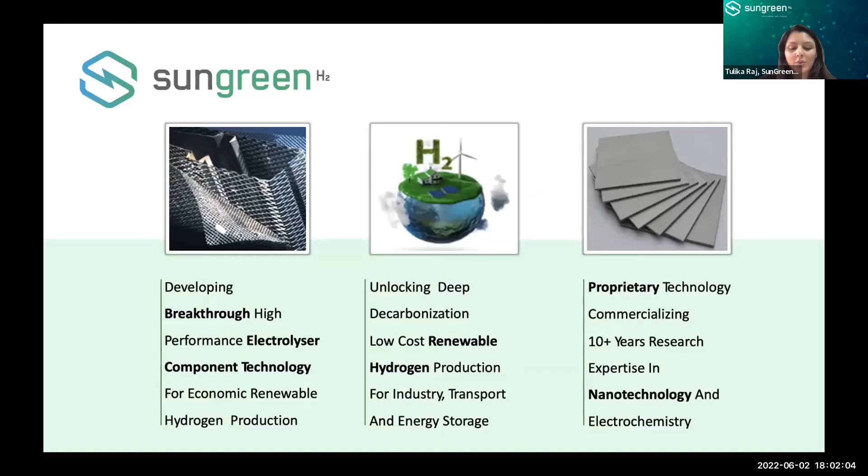Let me explain a little bit more about where the company is based and how we are tackling this issue. Green hydrogen is pretty much a global market. While we are based in Singapore, we have offices in Melbourne as well as London. Some of the customers we work with are based over in the Western Hemisphere, in the Americas as well as the European Union, and closer to home in Asia Pacific, Japan, South Korea, and Australia are really large markets for the further development of green hydrogen.

So let's take a step back and look at what we're trying to do with hydrogen. Hydrogen is not a new market. There is a lot of hydrogen in use in the world already.

The IEA expects that hydrogen use, being a completely emissions-free fuel, is set to grow in the next 30 years to 2050, and could really play a good role in delivering a decarbonized future energy system. But this largely depends on increasing the use of hydrogen, stepping this up, but also decarbonizing the production of hydrogen at the same time.

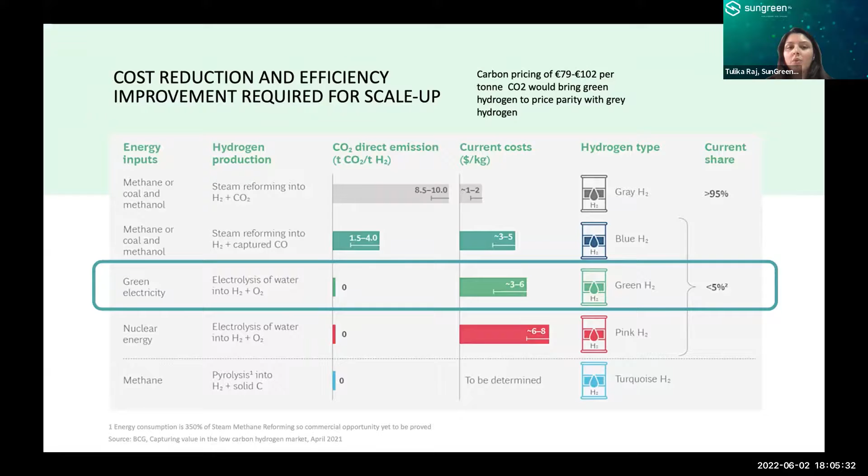So why are we into so many hydrogen production methods, and what's going on? We already have so much. 90 million tons of hydrogen is being produced in the world. Why do we need more ways of making it?

Simply because the fossil fuel reforming method of making hydrogen, which is almost 99.5% of the market as of date, creates 10 times as much carbon dioxide emissions for every ton of hydrogen made in this manner. In other words, we are talking about nearly 1 billion tons of carbon dioxide emissions currently associated with the production of conventional or gray hydrogen.

And if you can switch to a zero carbon way of producing this hydrogen, water electrolysis and green hydrogen is one method, then you are essentially talking about a way to take out 1 billion tons of carbon dioxide emissions from the atmosphere.

So that all sounds very good. It's a great way to put us on a decarbonized path of producing hydrogen. And of course, when hydrogen burns, it also doesn't produce any emissions. So you have a very clean, zero carbon way of producing the fuel, and then when you burn the fuel, there are no emissions. So it's an end-to-end zero carbon game.

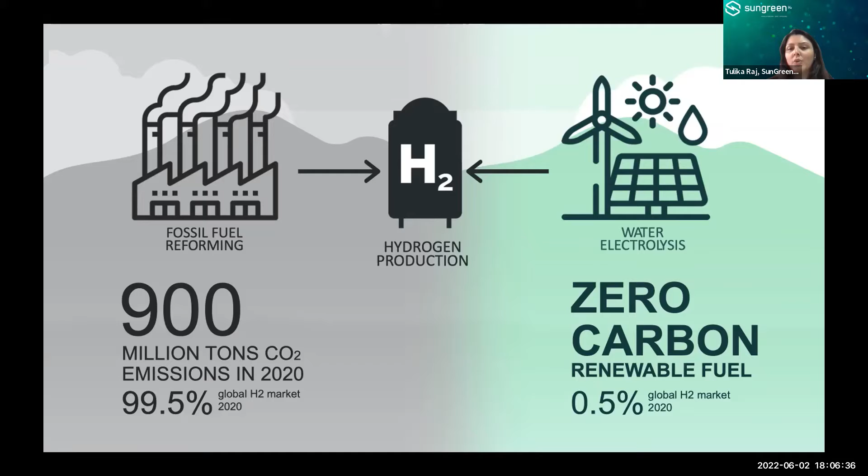So what's the issue? Why isn't the world already using so much of this? Because if you could use it, then suddenly you've got a way of having a zero carbon fuel and feedstock for our industrial use cases, for steel, chemical industry, the fertilizer industry, all our major heavy industries can start to use an end-to-end zero carbon way. And we're suddenly talking about really reducing a lot of carbon dioxide emissions from the atmosphere.

Not to mention newer use cases for this kind of zero carbon hydrogen or green hydrogen. You could use it to power your long distance transportation fleets.

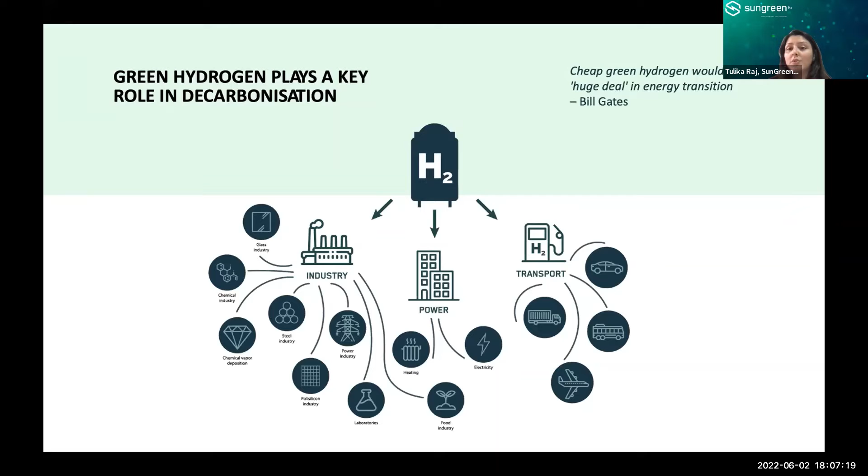You could use it to power, start to replace electricity and heat generation in homes, and also use it for long-term renewable energy storage, for example. It's some of these new use cases that are emerging, as well as the ability to replace gray hydrogen in the existing use cases, that is really driving the explosive growth in the green hydrogen market going forward.

So if it's also hunky-dory, then what's the holdup? The holdup is that globally, industrial decarbonization policy, including in this part of the world—Singapore has come out with its energy transition plan as well as its green plan—largely in Asia Pacific, but mostly driven also by the EU, Japan, South Korea, and the US and Canada, we are seeing a lot of legislative landslide that is driving the focus and adoption of green hydrogen.

However, the production cost, as we saw earlier, can be nearly 5 times more expensive than fossil fuel-based hydrogen. So there is no way to take anything and get it to be widely used unless it is at cost parity with the conventional systems, regardless of the carbon dioxide emissions.

On the previous speaker, I was really appreciating what you said, because at the end of the day, people are price sensitive. They may be carbon dioxide and emission sensitive, we may have respiratory diseases and affect our own health by air pollution, but at the end of the day, the economic reality is that unless we are cost agnostic between the dirty and the clean technology, there's always going to be a low cost incentive to adopt dirty technology, or carbon dioxide intensive energy.

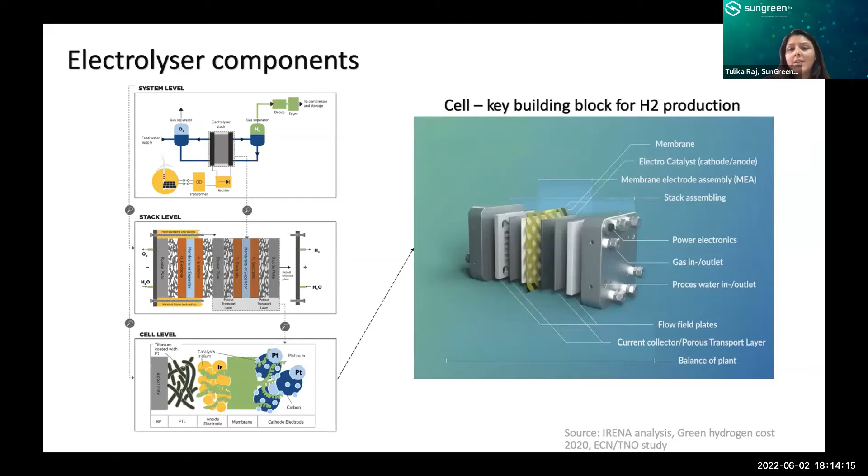So what do I mean by some of these core components for electrolyzers? All electrolyzers are made of a stack, made of a repeating bunch of cells. These cells are the key building blocks for hydrogen production in any electrolyzer. Looking at how we're using advanced materials in electrolyzer cells, we basically take the anode and cathode materials used for electrolyzers and drastically reduce the amount of platinum group metals loaded into these as catalysts.

So we reduce the amount of platinum used, we reduce the amount of iridium used. We also reduce the amount of platinization required with another component called the porous transport layer, which is typically titanium felt and is then platinized in order to make it very stable.

And finally, the other really expensive components in electrolyzers are bipolar plates. These are end plates within the electrolyzer cell that are often made with titanium in the case of PEM electrolyzers because it's got very long-lasting durability, and is then often coated with gold and platinum in order to achieve anti-corrosion and conductive properties in the field.

What we do is we replace these titanium bipolar plates with a lower cost material like stainless steel and other materials. We also put our proprietary coating on top of the bipolar plates in order to significantly reduce and eliminate the use of gold and platinum for these coatings. So with this advanced materials-based replacement of the materials used inside the core components of electrolyzers, we're able to reduce cost, improve performance, and improve durability.

The technology is under patent, and we are now starting to commercialize it by working with some of the leading electrolyzer manufacturers in the world, as well as with hydrogen end users, for demonstrating both the components standalone, but also working in a whole subsystem or a system.

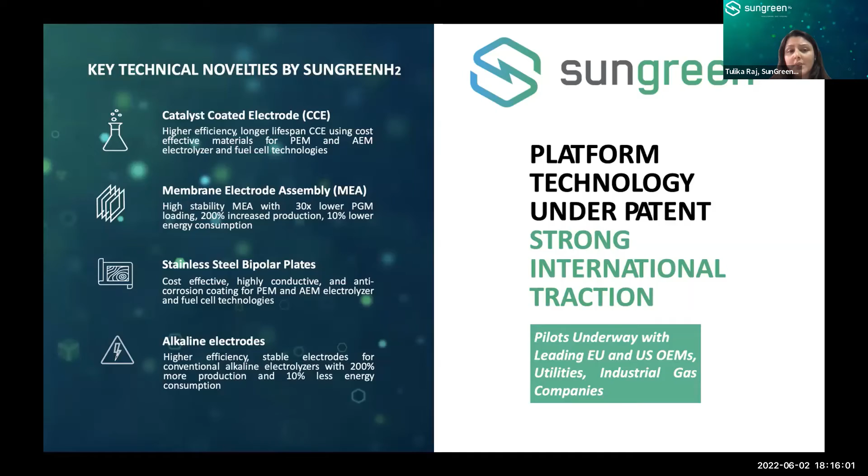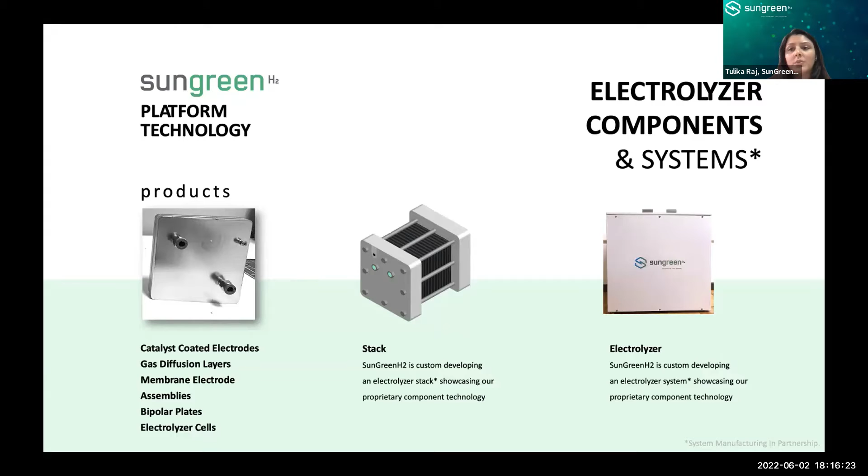What do I mean by that? We manufacture all the electrolyzer components, and the buyers of these components, for example, are your electrolyzer manufacturers in the alkaline and PEM space. But we also showcase our component technology in a standalone AEM electrolyzer stack and system in order to showcase the full capability of the materials to provide an end-to-end hydrogen generation solution.

We believe that the work we're doing in commercializing this research is really relevant for the industry because it helps, by plugging and playing these components into all types of existing commercially available electrolyzers, to lower the overall cost of green hydrogen coming out from electrolyzers.

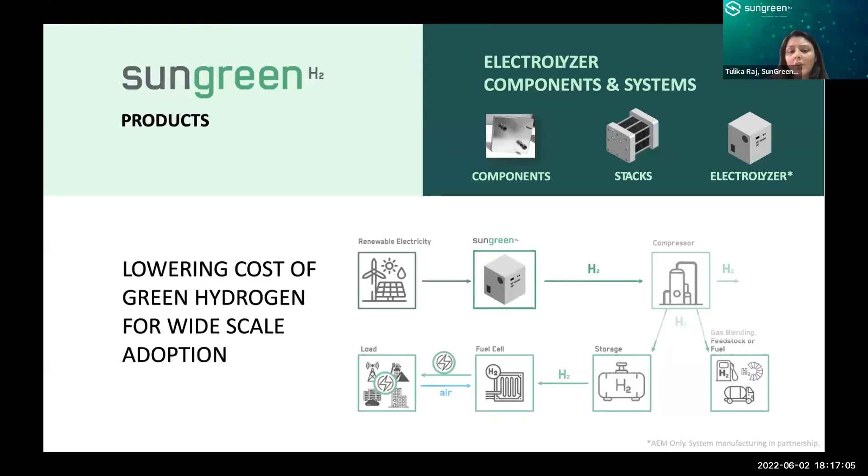This is the need of the hour: to make green hydrogen more cost competitive with gray hydrogen, the fossil fuel based hydrogen currently used by industry. So what we're trying to do is get green hydrogen to be more cost competitive in the distributed hydrogen stack for applications shown here, as feedstock, fuel, or eventually to power a fuel cell.

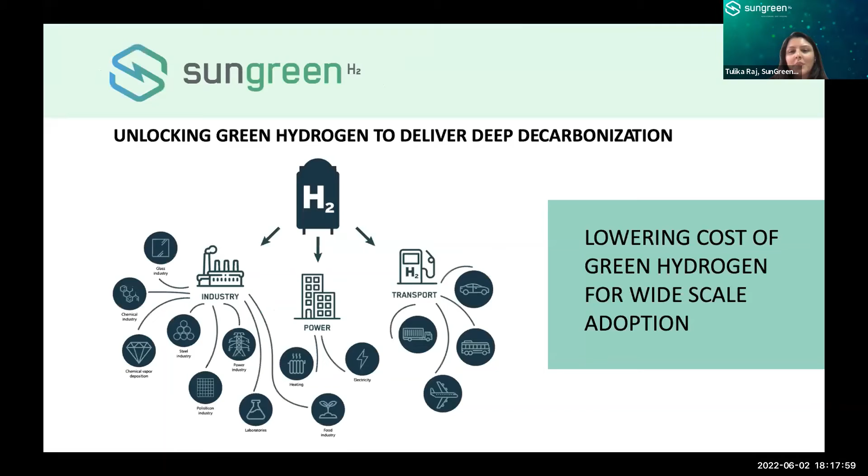So wrapping up this presentation, we are an experienced team commercializing over 10 years of research in this space, and we've won a number of recent awards and grants for our work. We're excited to be at this talk because we hope there are green hydrogen enthusiasts in the audience who are excited about a decarbonized, democratized energy future and would like to work with us. We invite anyone considering an internship or career in this fascinating new green hydrogen technology to reach out and contact us. Come join us if you're interested in unlocking green hydrogen to deliver deep decarbonization.

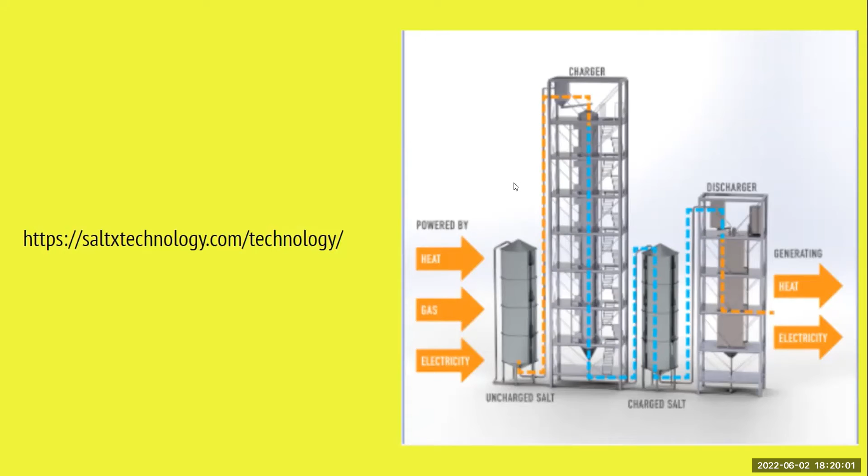They have a technology with thermochemical storage. Thermochemical storage, yes, it is green energy. And why? That meeting changed my view, and I said yes to Anoki. And why is that so? Look at their technology: they use calcium oxide, a hydration of calcium oxide reaction for energy storage, thermochemical storage, which is known. But what is the technology?

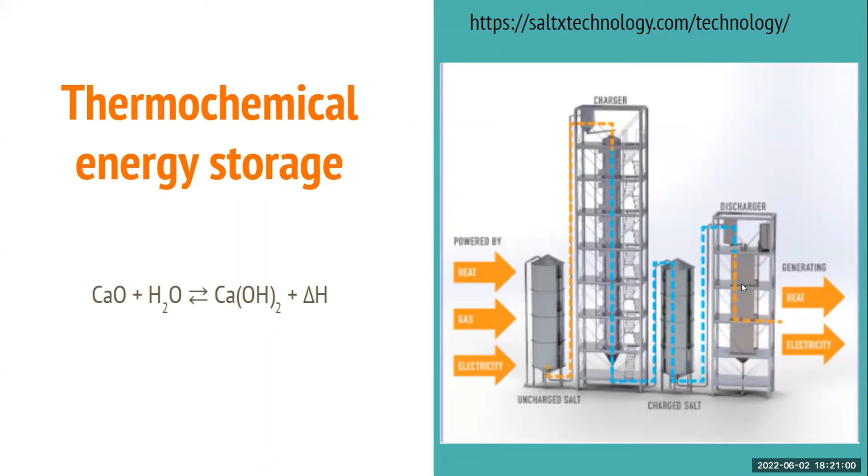They use powdered calcium oxide, nano-coated, and store the uncharged salt in a silo. They use aeromechanical technology to fill the reactor for the charger—this is a downcomer. Charged salt is again stored in a silo, and they use the discharger, which is a fluidized bed reactor. There you go—I work with granular materials, and I found my connection with green energy. Silo, downcomer, again silo, fluidization. Fluidization is a fairly new technology used in biomass gasification and thermochemical energy storage. Okay, and that's why I said yes to Anoki.

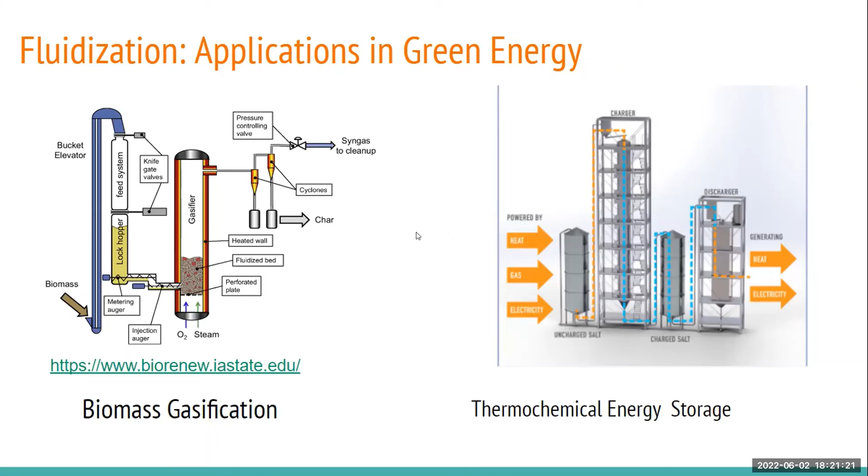Now, unlike the other three talks today, my talk is going to be on the technology itself. That's what Anoki said when he shared the guidelines with us—we have to talk about a technology and our research components. I'll take you quickly through the research of my group, and my direct contribution to green energy itself.

Before I get into fluidization technology, let me define granular materials: a large collection of small particles, ranging in size from a few microns—dust particles—to a few kilometers—asteroids—with hundreds to millions of particles. In a fluidized bed, we have millions of particles. What do I mean by small particles? Are they of molecular scale? No, they're large enough that molecular fluctuations are negligible—this Kb here is the Boltzmann constant, and Kbt is negligible. Materials, anything you can think of.

Starting from your kitchen to beach sand, to the sand in the hourglass, wood chips in biomass gasifier, biomass pellets, anything that you can think of falls under this material. I have written 2. Why did I write 2? Because in biomass gasifier, one actually mixes sand and wood and then gasifies.

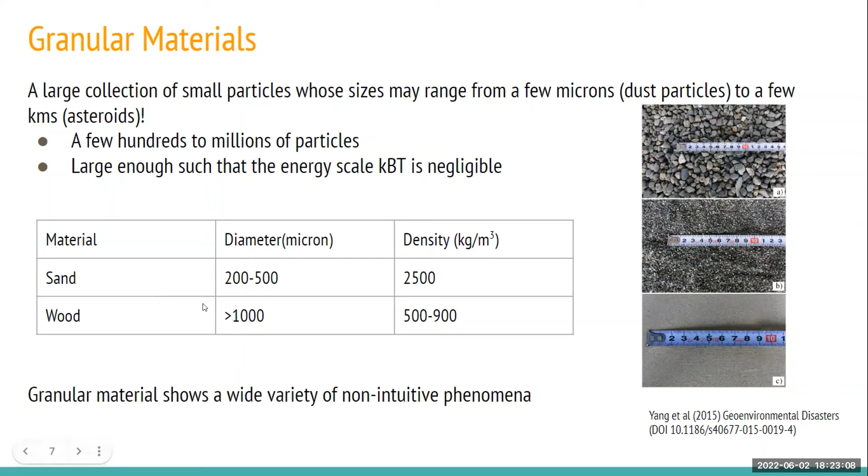Granular materials show a wide range of non-intuitive phenomena. I wanted to show one phenomena today. I wanted to do a demo experiment, but that may not be possible, so I will just describe this phenomena.

Suppose if you take 2 bottles with a straw. Now, if one bottle is filled with water, and if you press the bottle, what do you expect? Come on, students, what do you expect if you fill a bottle with water, and if you press it? You expect the water level to go high up in the straw. But if you fill a bottle with sand, and then pour water in it, the initial level is here. If you press the bottle, the water level comes down. Any idea why it happens?

The sand inside reorganizes itself and creates some space. The interstitial space increases, and the water fills those spaces and the water level goes down. That means granular material undergoes dilation.

Why did I choose this demo experiment? What does dilation have to do with fluidization? Let us discuss what fluidization itself is and why fluidization is becoming a preferred technology for green energy as well as any other shades of energy.

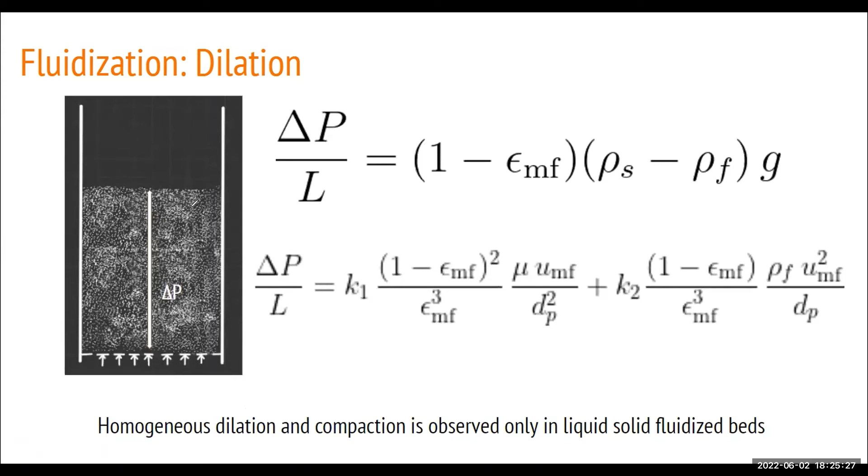Fluidization is a technology where you have a bed of solid particles and you pass fluid through it. It can be liquid, it can be gas. At certain fluid velocity, the pressure drop across the bed equalizes the weight of the bed itself, and at that point the solid particles get dislodged from each other. The moment the solid particles get dislodged from each other, the entire surface area becomes available to the fluid. So if there is heat transfer, mass transfer, or a reaction taking place, the entire surface area of the solid particles becomes available, and naturally the efficiency goes high up.

So whether it is green energy or any darker shades of energy, as a reactor or as a unit operation or unit process equipment, fluidized beds are becoming more and more preferred. These equations are design equations.

Why is dilation connected? The moment it becomes fluidized at the minimum fluidization point, the bed expands, that is the bed dilates. If you keep on increasing the gas velocity, the bed keeps on increasing, then gas bubbles start forming inside the bed. If you keep reducing the gas velocity, there is a hysteresis observed in the bed and the bed gets compacted. Okay, let's move on.

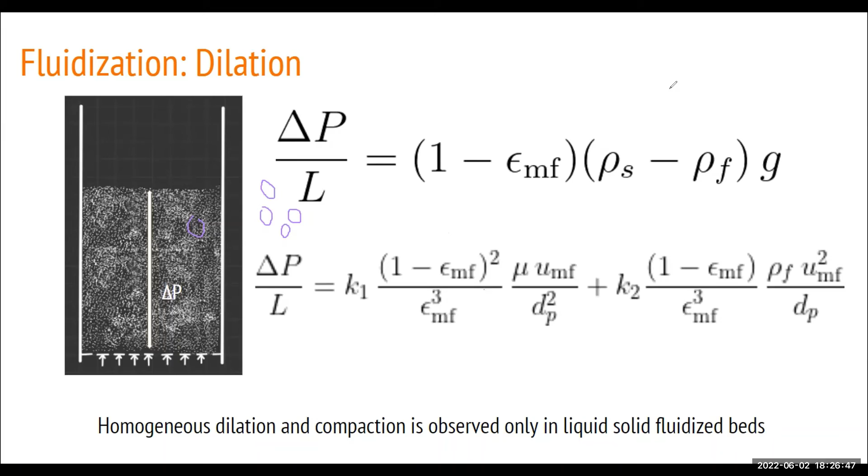One of the speakers, I think Dr. Vasundhara, highlighted energy efficiency. The new gasifiers are used based on circulating fluidized bed technology.

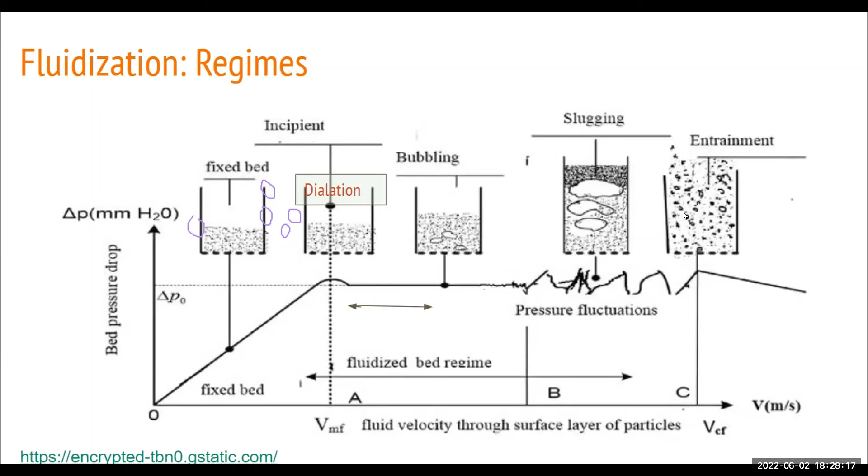Now, particle classification. It's not only the fluid velocity that decides what kind of regime the bed will behave in. It's also the nature of the particles, and there is a classical particle size classification based on the density of the particles versus the particle diameter.

There are 4 different regimes: A, B, C, and D. C stands for cohesive particles, which are very, very difficult to fluidize. A and B are easy to fluidize. D is a spoutable, spout-like bed. So if you know the density of the particles, you can choose the particle size and know how the bed is going to behave.

Here the dots that you are seeing, blue, green, purple, and maroon, perhaps maroon, are the same particle, a sand particle. I have chosen sand particle intentionally. If you have something around 1000 micron, the bed is going to behave like a spouting bed. If it is somewhere around 500 micron or 300 micron, it is going to be a very nicely fluidized bed.

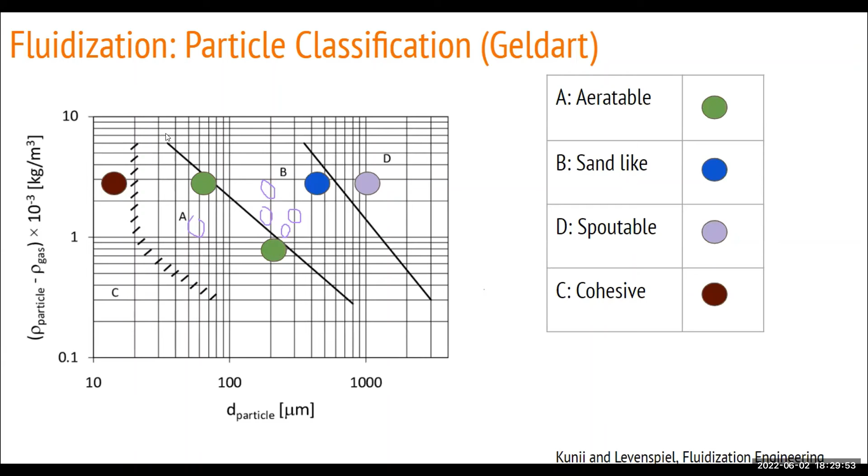It is called sand-like particle because most experiments have happened with sand or glass particles, glass ballotinis - aeratable particles, aeratable bed. Then there is cohesive bed, which is very difficult to fluidize. If you have polymer-like particles, wood chips and so on, the size distribution is slightly different. If you have iron beads, the size distribution is going to be different.

Now let us look at the development of technology. I said that fluidization is a very new technology. Why did I say so? First, commercial production happened in 1942, the first production facility using fluidization for cracking of petroleum for petrochemical production by Exxon. Then during 1945, fluidized beds were used for rubber production. So it's just 80 years old technology. In terms of technology, it is actually fairly new. Think of water splitting reaction, or any other technology - they're actually older than this technology.

This is a development curve. Phenomenological modeling started happening in the 1950s, design equations and all - still in use because all design calculations are based on developments from the 1950s and 1960s. Seminal work happened between the 1960s and 1970s on continuum description of fluidized bed. Closure happened in the 1980s. Work is still going on. Research is very much active.

A different kind of work happened in 1990 where individual particles in the fluidized bed were being tracked. In 1992, to be precise, this work came into publication, and research is very much active, with focus on simulating large systems with millions of particles, making algorithms more efficient, understanding fluid phase turbulence, and wide size distribution of particles. Experiments are not anywhere behind these simulation methods - we are using sophisticated experimentation technologies like X-ray tomography and visualization methods to understand the flow within the fluidized bed.

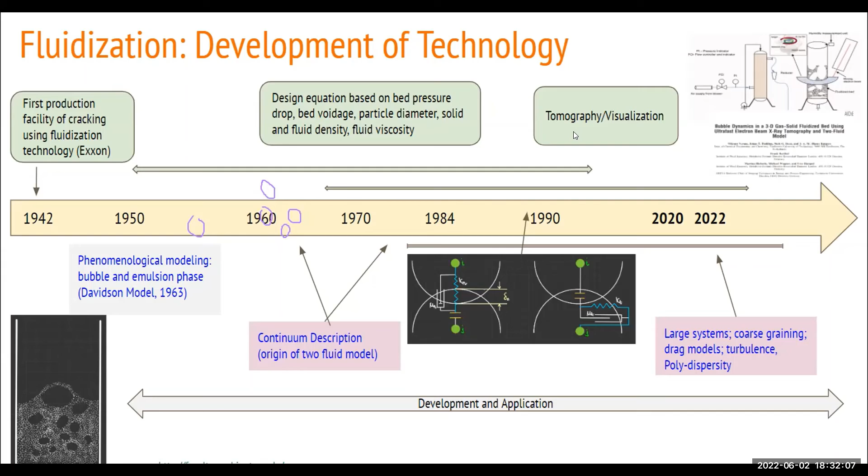Now, what is the research in our group? We are working with binary mixtures with a primary focus on biomass gasification. In biomass gasification, biomass pellets are mixed with sand-like particles. There are two distinctly different particles, and when distinctly different particles are mixed in a fluidized bed, they behave completely differently.

The graph on the left-hand side shows the fluidization and defluidization behavior of particles with a wide size distribution. It shows that the bed has a very small hysteresis, and it also marks a minimum fluidization point, though there is a departure from the fixed bed at an early point, but then it can be extrapolated. Why is there a departure? It is because there is a wide size distribution - the small particles within the cage of the large particles start getting fluidized, and that's why there is a semi-fluidized bed. However, the line can be extrapolated.

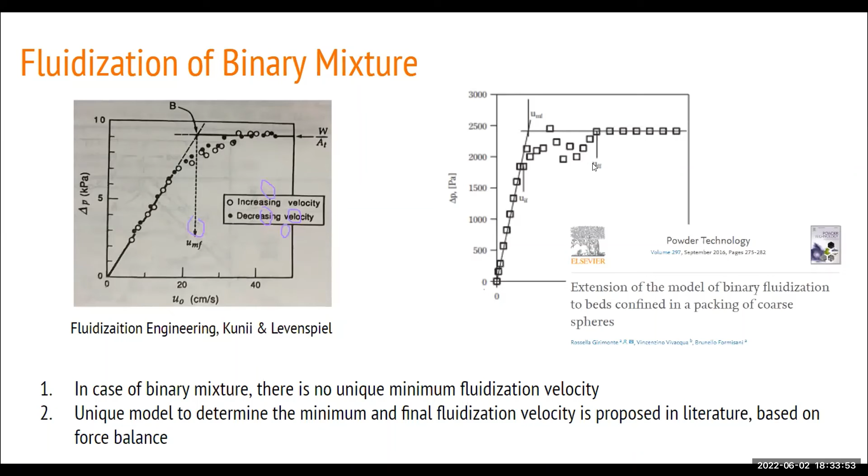In literature, they say that if there is a very wide size distribution, such that the size distribution has two peaks, you cannot have one minimum fluidization velocity point. You can have one minimum fluidization velocity point and one final fluidization velocity point. However, there can be unique equations. What we have shown is, depending on the initial configuration of the bed, there are completely different natures of fluidization.

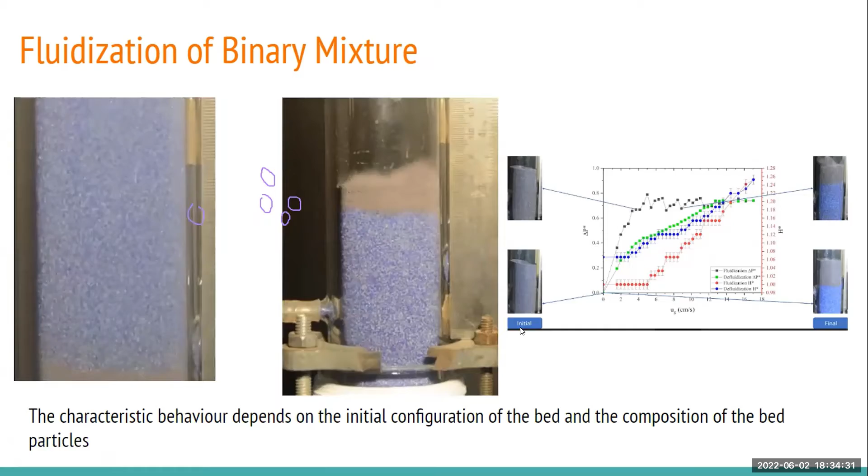I hope this video plays. You see, here we have one configuration - it is a nicely bubbling fluidized bed. Here it is a slugging fluidized bed - there is a gas slug in between the bed, and one solid block is moving like one block. So this is one of our research areas. We do experiments as well as simulations.

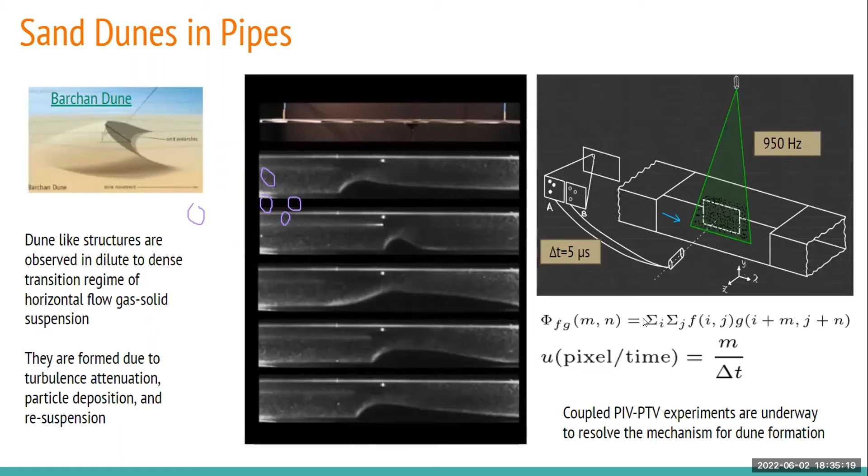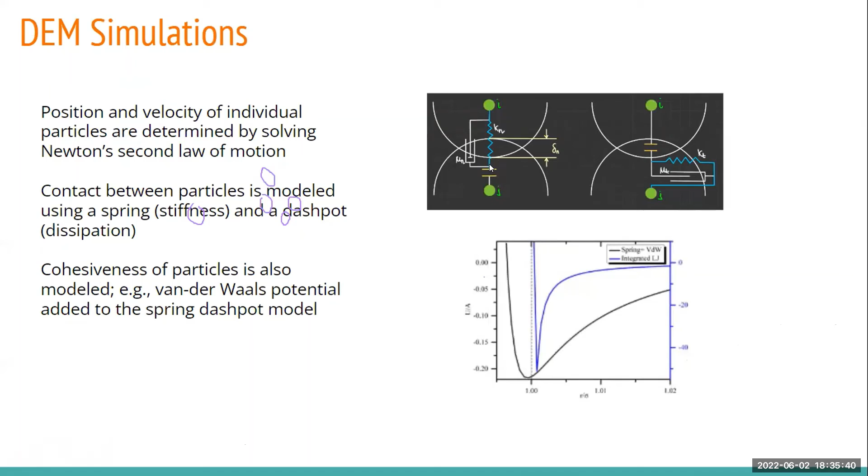They are formed due to turbulence attenuation, particle deposition and resuspension. We are working on them using high-speed imaging and trying to understand the exact mechanism of why the dunes form in the pipe. We are also performing DEM simulations wherein we are trying to simulate cohesive particles using the potential of spring-dashpot, putting a spring between two particles and a dashpot, and adding the van der Waals potential.

Now, to summarize our research work in the group: fluidized bed is a relatively new technology, about 80 years old, that is widely used in energy and renewable energy technologies such as thermochemical storage systems and biomass gasification. They show a wide variety of phenomena which are yet under the scope of research, and that's where we come in.

Visualization experiments and detailed simulations are complementary to each other.

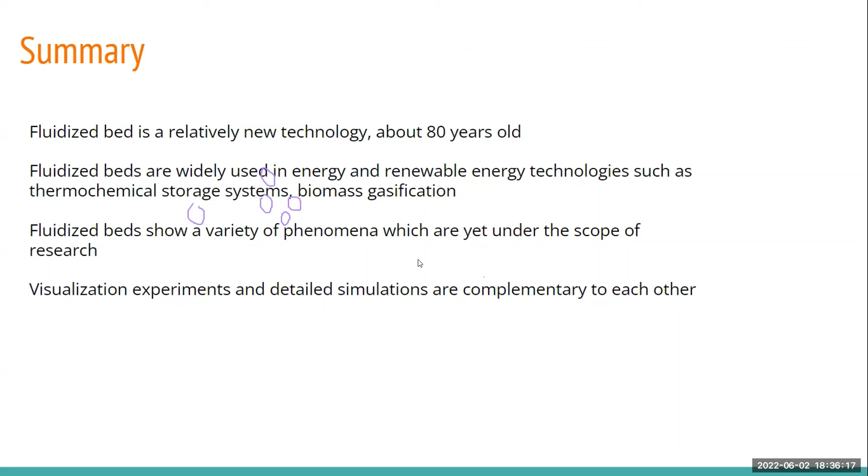Having shown our indirect connection to green and other shades of energy, we are now showing a direct contribution to green energy. We have worked with energy storage systems, thermal energy storage systems, which can be used for solar thermal energy storage. We have developed a thermocline based single tank, single media thermocline storage system, which has shown the least thermocline thickness, about 20% less as compared to the present day literature.

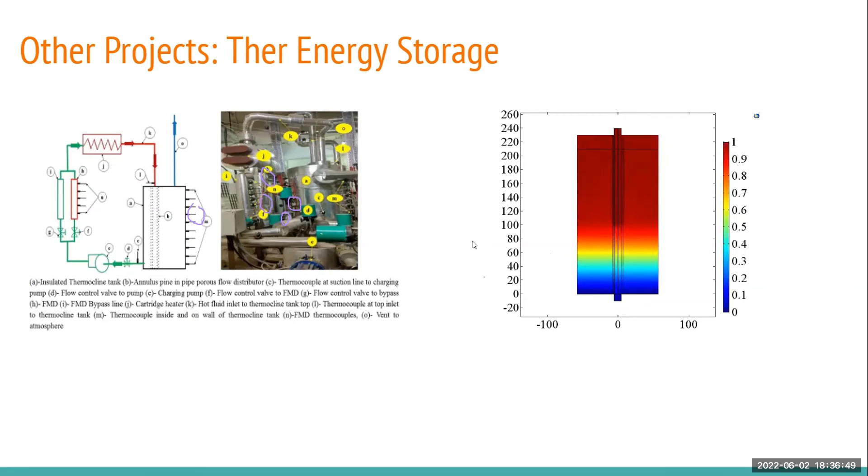With that, I come to an end of our group's research, and coming to today's topic, women in energy. I was doing a little bit of research on that.

Renewable energy employs about 32% women. The conventional sector employs about 22% women. In STEM, women at the workforce is 28%. Women in STEM higher education is 35%. So there is a 7% drop from higher education to workforce.

At IIT Bombay, which is a technological institute, we have roughly about 22% girl students, and we are about 15% female faculty. With that, acknowledgement to my teachers, supervisor, collaborators, funding agencies who help us do research, colleagues, students, and my family.

And with that, a big thank you to all of you.